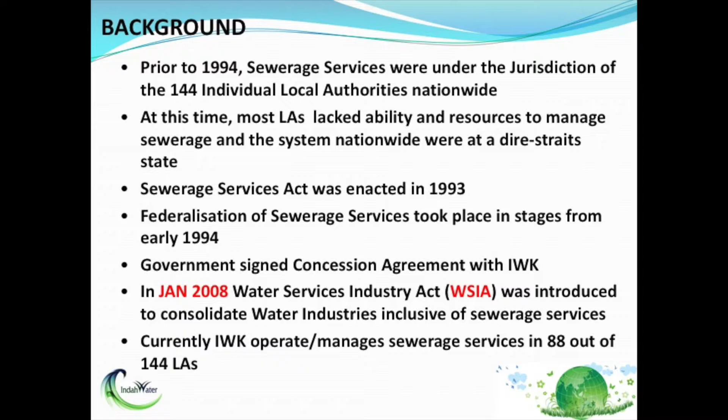This is the current governance structure for Indah Water. So under the Malaysian government, we have 3 ministers that we have to report to: the Ministry of Energy, Green Technology and Water, Ministry of Natural Resources and Environment, and of course our big boss, Ministry of Finance. So all this funding, all this government support loans will of course come from MOF, Ministry of Finance.

So under Indah Water, we operate 88 local authorities. So billing and collection comes from Indah Water, we give it. Refurbishment and upgrading program, basically upgrading of plants, maintenance wise. Okay, so all these charges must be under Indah Water.

All these treatment plants, like you are in here right now, it's not being built by Indah Water. It's being built by the developer. All the plants are built by the developer. Then only they will fully give it to Indah Water to operate. That's it. So we are like the main operator.

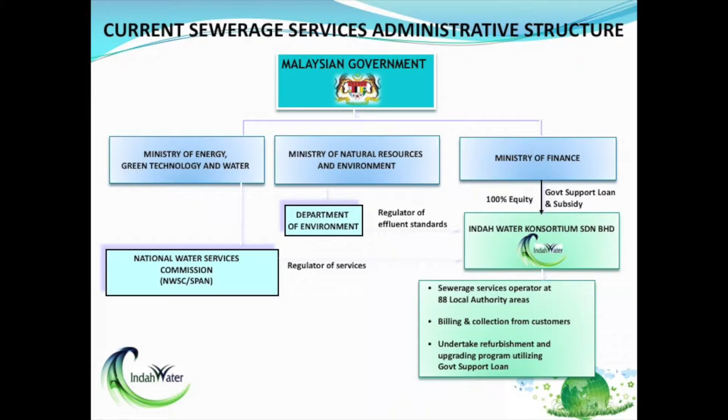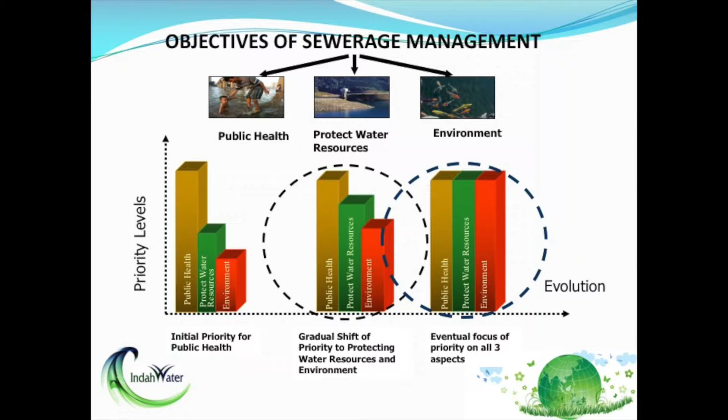Objectives of sewage management, of course, protect the water resources for public health, for betterment, for the good environment, and to eliminate all waterborne diseases. That's why we have sewage management.

The type of system, we only have two systems, which is connected system and IST, individual septic tank. This is the

animated view of the sewage treatment plant for extended aeration, from your house until the plant itself. So from your houses, we have the private sewage pipes. This is all the wastewater.

Just to inform you guys, Indah Water only treats domestic wastewater. Commercial we don't treat, like all these factories and so on. They have their own sets of treatment. So we only cater to domestic, which is houses.

Apartments and condos, so all these private sewage pipes enter the inspection chamber, then the public sewage pipeline, and the raw sewage enters the pumping station to the screening chamber, mechanical screening chamber, where they remove grit, flow management, and remove all the garbage. Then only the raw sewage wastewater can enter the aeration tank.

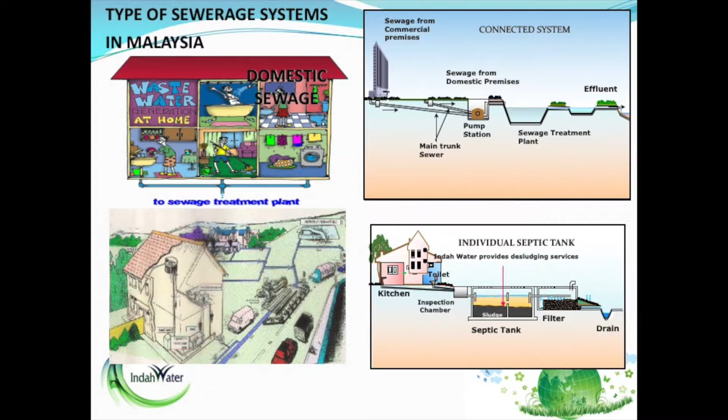So basically it's all biological treatment. There's no chemical added. It will go to flow distribution, final clarifier, which is a sedimentation process. Then the effluent will go into the nearest drain. It's very straightforward, very simple treatment. Basically, we just put oxygen

inside here, there are a group of bacteria, but of course for that we need to ask the plant manager what group of bacteria that we planted in the water treatment. We walked through the slide before.

From domestic customers, channels go to underground pipes, grit chamber, cleaning process to remove trash, large debris, grit and sand. This is where, probably if you read the papers, you can find

babies, fetuses being thrown into the toilet, being pumped in. So it will start in the screening chamber or grit chamber, that is where they will start. Every time, if someone unfortunately just throws away their baby, it will start at the screening chamber. So this is where we will find it.

So all this trash, we will catch here first. Then only the water can go into the tank to remove the suspended solids, and again the wastewater will go into the aeration tank. In the aeration tank, the air contains oxygen, which is used by the aerobic bacteria to neutralize the organic waste.

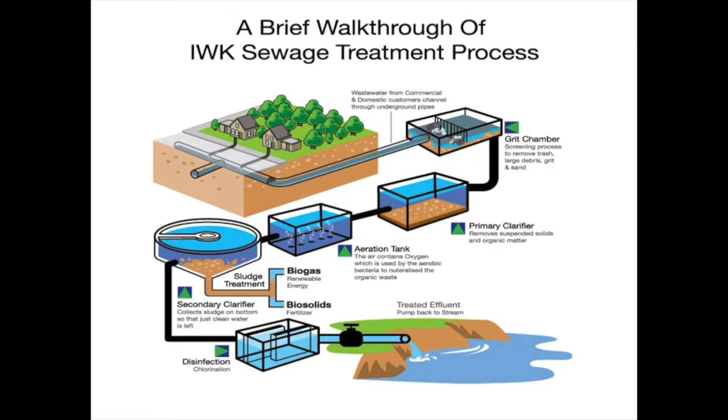Okay, this is the IST system. It depicts the flow of sewage and waste from your toilet, bathroom, kitchen. Every time you do your business in the toilet, all this wastewater will go into your septic tank. If you guys have ever seen a septic tank before, the rectangular thing that's always rusty.

Probably there you will see IWK or pembentungan, for example, probably 18 by 24. Probably you saw that, okay? Probably at the side of your house, in front, but it will be in your house. Have you ever seen it before?

So usually you have 2 to 4 in your house. If you have 1, meaning your house is using a connected system. Very easy, if you have like 1 chamber only, either rectangular or round shape, you are using a connected system. If you have 2 to 4, the house is using a septic tank.

So septic tank is a system that exists from the 1960s. Until now we have nearly 2 million septic tank users. So septic tank users is where you can see the Indah Water lorry will come and do the desludging from your house. So this is how they use septic tank.

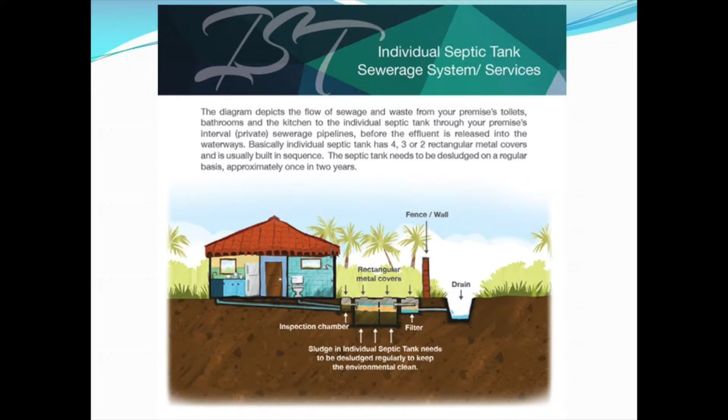They opened our manhole and threw cement in there, to make their life easier of course. I don't know how they can open our manhole like that. They pour cement and all this garbage into our sewer system. What happens is our nearby plant gets affected, because the sewage gets harder to treat. So that's one example.

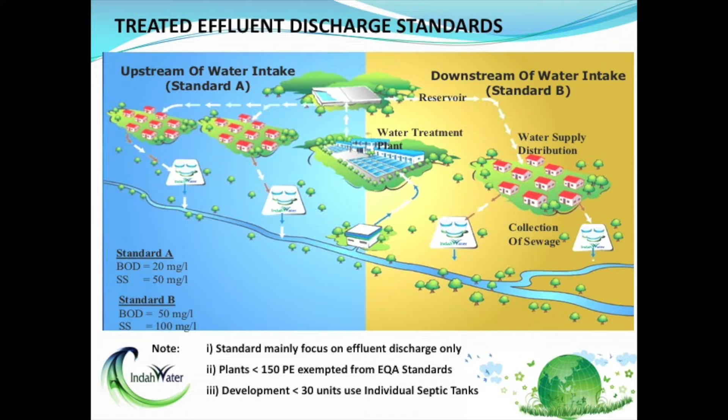We operate more than 80 regional sewage facilities. These are some examples of our regional facilities. The main ones in Klang Valley are Pantai STP, Bandar Tun Razak, which is here, and Taman Tun Dr. Ismail.

The design population equivalent here is 100,000, but we can cater to nearly 500,000 people in Bandar Tun Razak, with a carrying capacity of 22,100 meter cube per day.

The process is sequencing batch reactor. What I know about SBR is that basically all the treatment is done in one tank, so all the emissions are in one tank. If you have any questions about SBR, you can ask the plant manager during the plant visit.

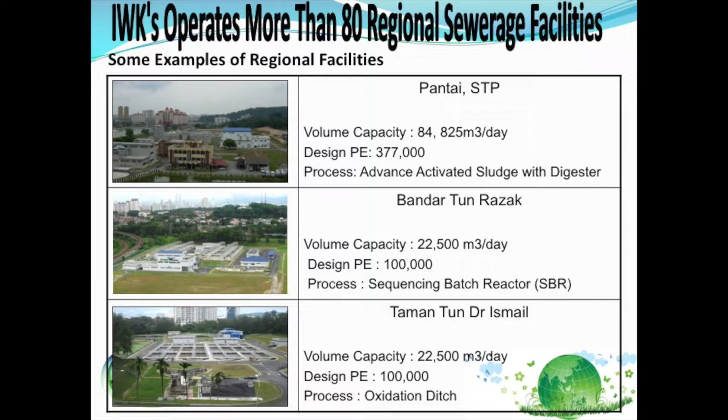Sustainable sewage planning - let's skip this one. Here's an example of improvement after effective planning. On the left side is an example of a treatment plant that doesn't look like a treatment plant.

This is before 1994, when the plant was taken care of by the local authority. This is how it looked - it doesn't even look like a plant. The sewage was discharged directly to coastal water. Even at the Bayan Baru sewage plant, you can't even see the plant.

After that we improved it. Of course, we designed a new STP treatment plant. Bayan Baru, we upgraded it, so at least we have our own clarifier now. This is in the Penang area.

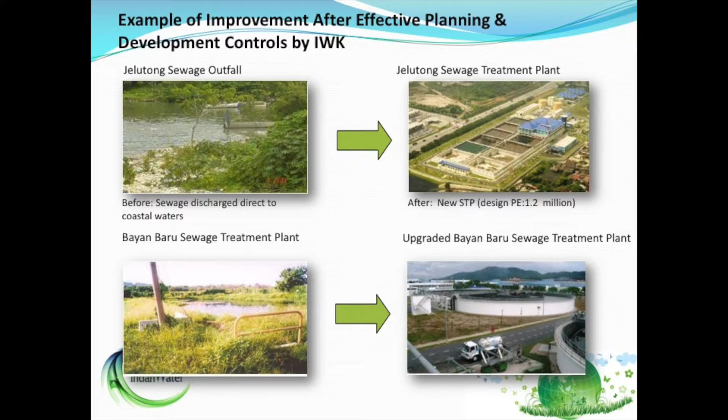But not everyone knows that. So, plant refurbishment to improve public sewage facilities. Refurbishment of STPs covers 5 categories: safety, mechanical works, electrical works, civil works, refurbishment of sewer network, CCTV investigation, rehabilitation.

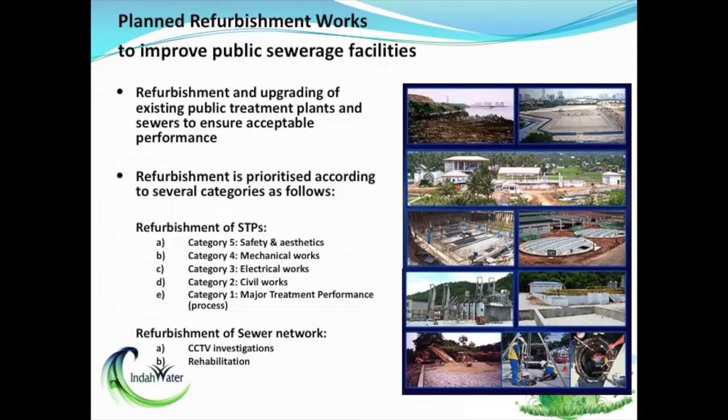We have a customized system for managing customer inquiries, requests, and complaints 24 hours a day. So if you have any complaints about overflowing manholes, plant problems, or the famous missing manhole cover, you can just call IWK online.

Value for sewerage development - this is our R&D findings. This R&D findings is basically located at our plant in Bunus, where we have a small R&D facility.

TTF, our technical training facility - we have a training center in Sungai Besi. If you've ever gone on the Sungai Besi highway, you can actually see it on the right hand side, if you're from KL. We have a basic research laboratory for experiments, a collection of sewage equipment for training, and some basic amenities.

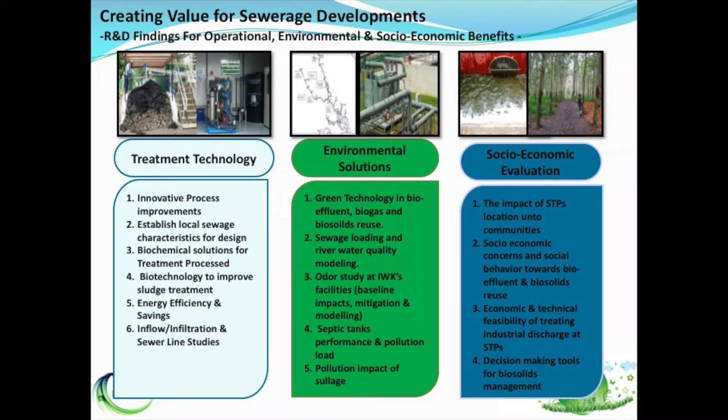These are just some pictures of our training area: demonstration for SCV, a mock facility for control planning, and the famous confined space training, where you can actually go into a manhole. Confined space training is the famous one.

Our station at the international level - we have MOUs signed with other countries to help them improve their water sanitation or sewage systems in their own country. We've had study visits from Oman, Iranian delegates, and the Philippines.

Sewage charges for government premises: 40 ringgit monthly for connected service and 25 ringgit monthly for IST. This is based on average water consumption in excess of 100 cubic meters monthly.

For domestic payments, the charge is 8 ringgit monthly for connected service and 6 ringgit monthly for IST. These are the two charges for every month, but our bills come quarterly, so probably you will pay around 18 to 24 ringgit per quarter.

Some houses pay 2 ringgit charges, but basically that's for low cost premises under the government, so they only pay 2 ringgit.

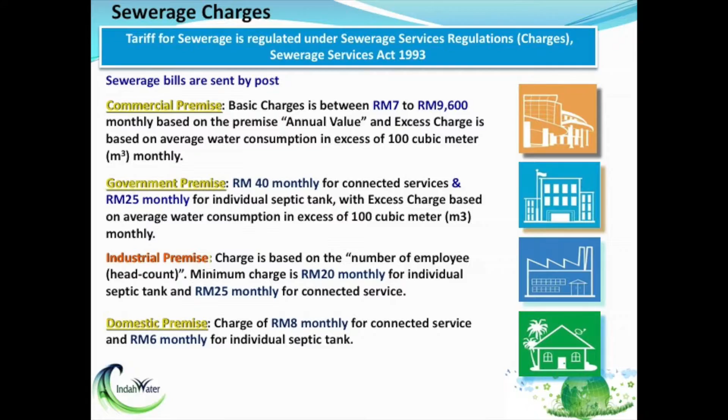Communications program: we have our own public relations, operational issues, illegal connections, faulty sewage systems. We need to find solutions with members of parliament, and we engage state executive regulators. For any complaints or inquiries, we have to reply within 24 hours.

TV advertisement - I don't know if you guys have heard us in the news. Newspaper ads, some ambience advertising, like putting stickers in the lobby to make it more presentable to the public. It's more like our branding agent.

Radio commercials - does anyone ever tune in to Bandar, Hot FM, My FM, or no? Radio commercials and publications.

We exhibit materials once in a while. Exhibitions - basically this is more on our R&D products, like biosolids and biogas.

Community engagement - we engage with the public in terms of friendly posts, close to the community. We create fun events like coloring contests, clown performances, basket performances, to engage more friendly with the community. So we have face-to-face explanations, and we can set up inquiries and payment counters during community engagement.

So that's it. You guys have any questions regarding buildings? About the plant, you can go to the plant visit and probably ask questions about what treatment is done by the plant engineers. But on this slide itself, do you have any questions?

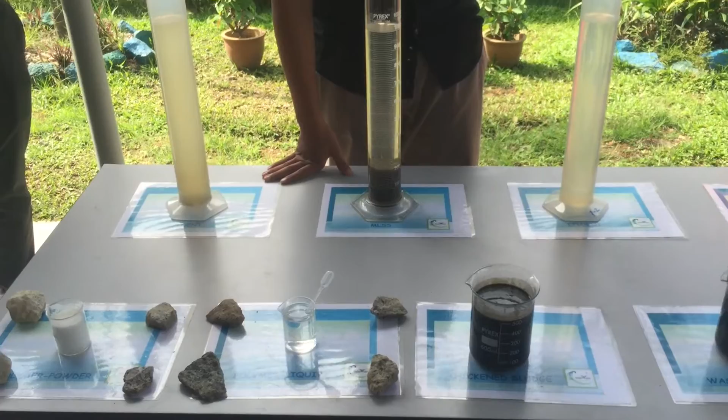No? Probably after this, after the plant visit. Okay, so now it's done. Instrumentation - inside there, they will have my colleagues, one responsible for process and another responsible for sludge. So I will brief you before we go to the site visit, briefly giving an overview of our system here.

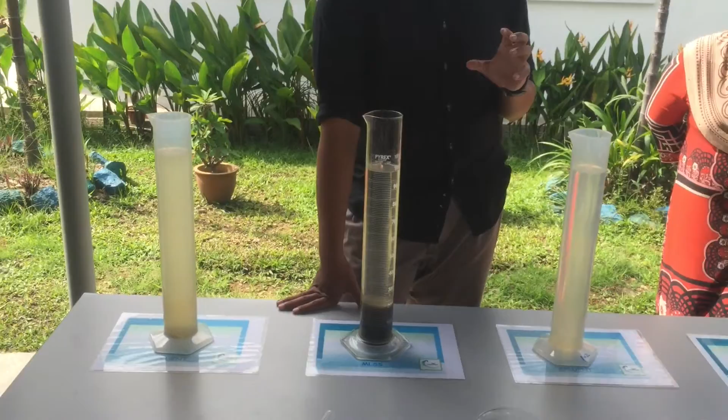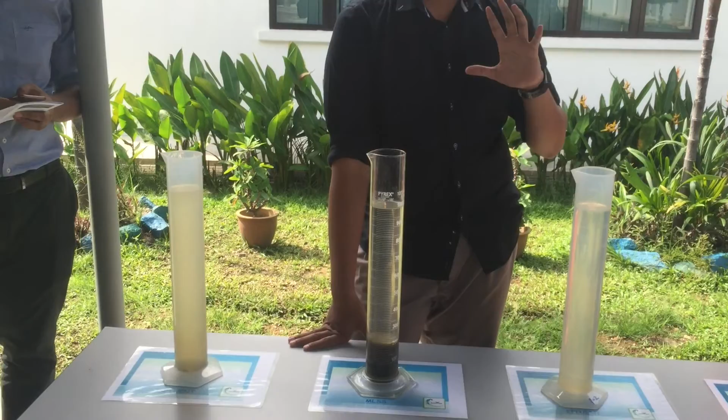Basically, our plant operates based on the SBR system. SBR stands for sequencing batch reactor. If you go to any water plant, they will have a specific operation, what we call unit operation. Here we use SBR. If you go to another plant, maybe they will have a conventional aeration system, maybe an oxidation pond, or an oxidation ditch, or something else. But here we only operate using the SBR system. So if you go to another plant, there will be a different system.

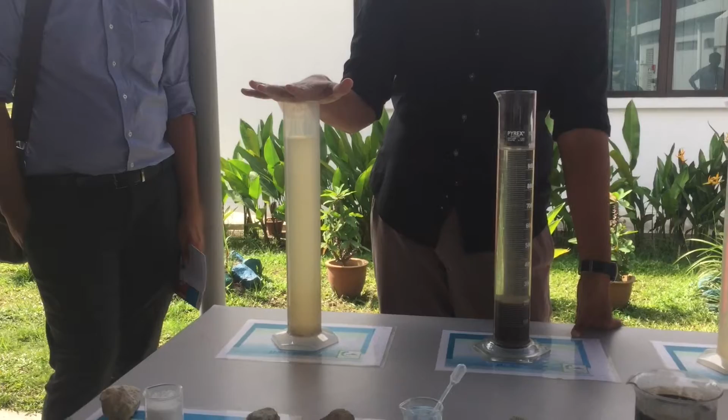Basically, what we treat is wastewater, domestic wastewater. This is the influent that we receive from two pumps - we have two pump stations, one located behind there, and another one behind there. So whatever sewage there will be pumped into our plant for treatment. This is the sample for influent, what we call influent. This influent will undergo preliminary treatment to remove grit, sand, and also oil, before it is stored temporarily in the EQ tank, the equalization tank. Then from the EQ tank we pump it into the SBR tank, which is the heart of the process. In the SBR tank, we monitor the MLSS, DO, and pH.

Okay, so after it undergoes the SBR tank, the final effluent will be discharged straight away to the river. What we get from the SBR are two products: effluent, which is water, and also sludge.

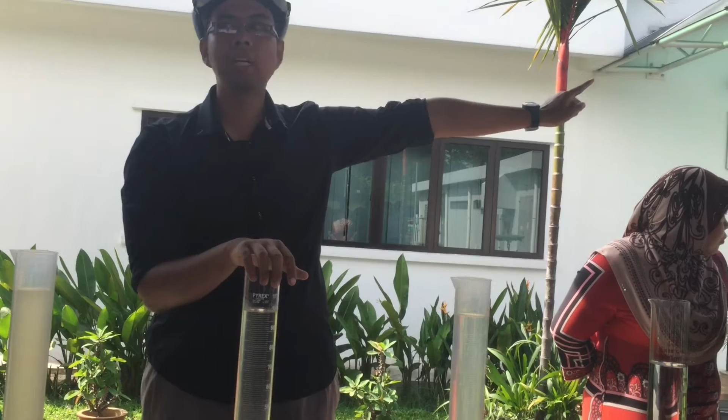We call it biosolid. The water will be straightly discharged, but the sludge will be pumped into our SHT, which stands for sludge holding tank. This sludge will be further treated to remove the water content before it can be disposed of.

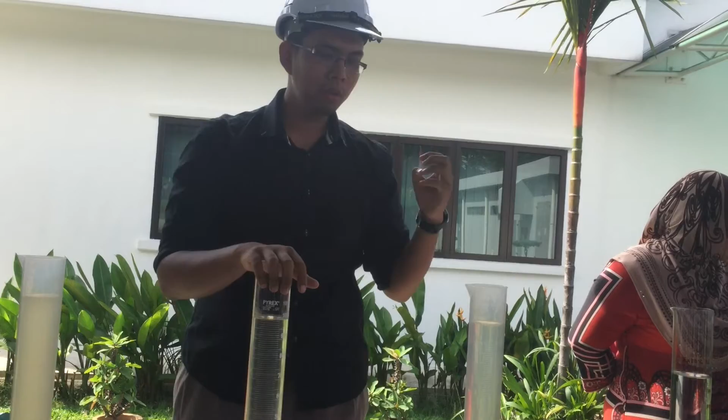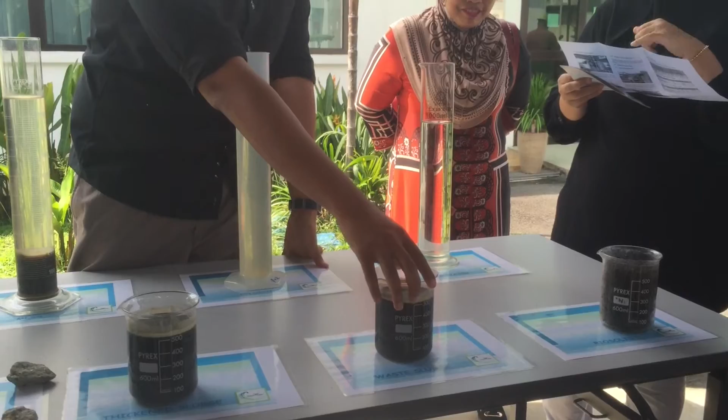This is waste sludge, which is the sludge purely from the SBR, and it will be stored in the SHT before treatment. After that, it will be pumped into the mechanical thickener.

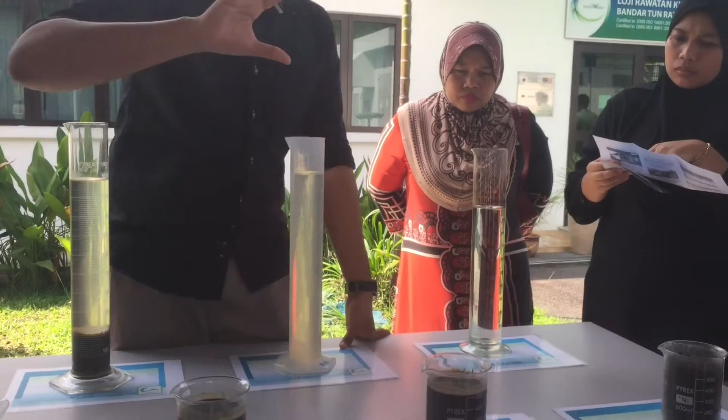In the mechanical thickener, we will remove the water up to 2 to 4%, so the water content will be a maximum of 96%. We add polymer as a dewatering aid to enhance the flocculation so we can remove more water.

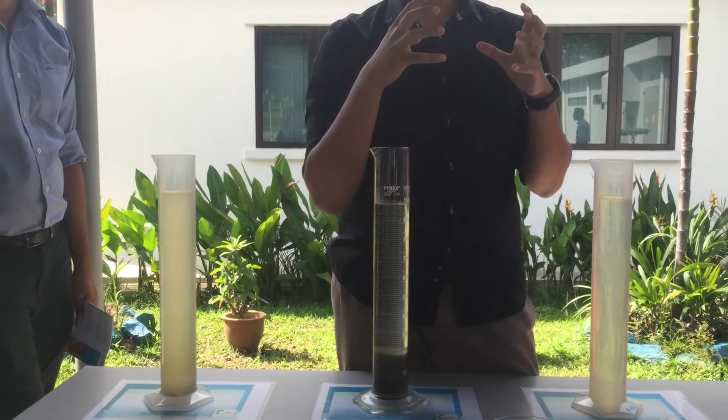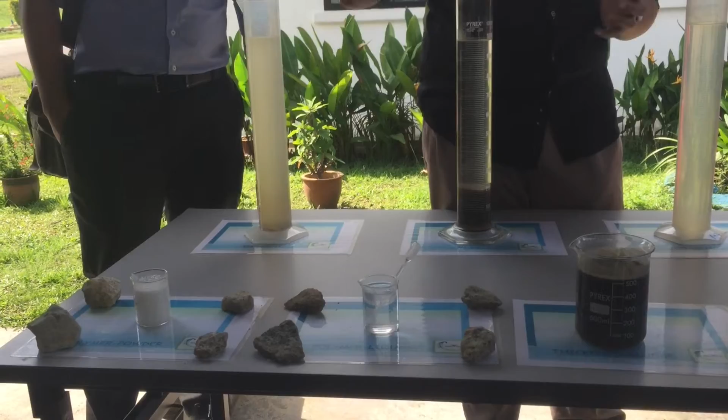This is a sample of our solid polymer. This polymer needs to be dissolved first with water, then added into the waste sludge, and then it becomes thickened sludge, which temporarily goes into the thickened sludge holding tank.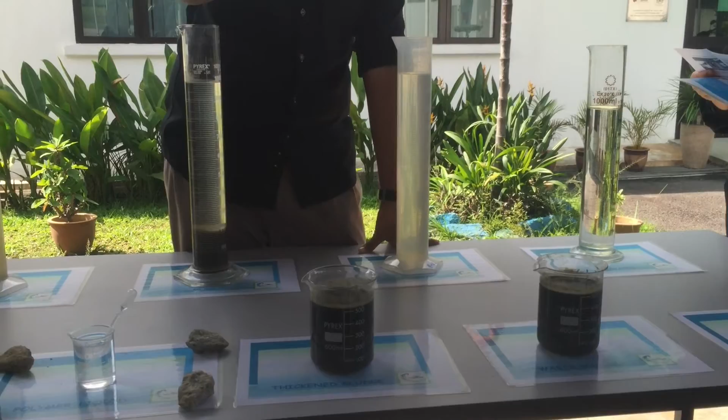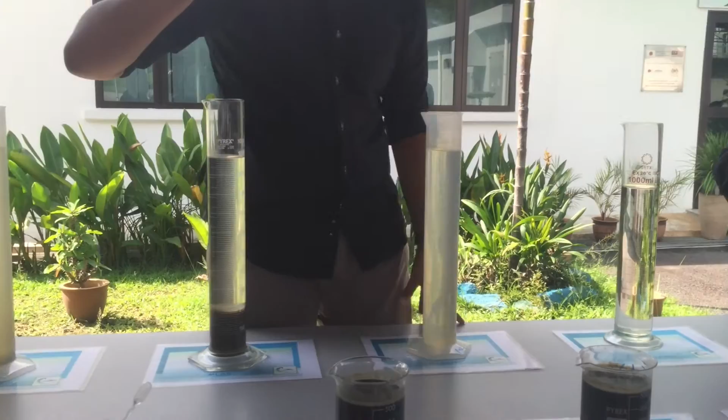After that, we dewater it again using our dewatering machine. Just now the water content was up to 96%; after it undergoes dewatering, it will reduce the water content to a maximum of 85%. This is the final product after dewatering, the biosolid, which will be disposed of into the landfill.

Currently, selling it for fertilizer is still under research. Here in Indah Water it is still under research. I don't know about outside, because here our main activity is operation and maintenance. So whatever product we get here, our HQ for R&D will get the sample to do more research and come up with their idea to sell it or use it for fertilizer.

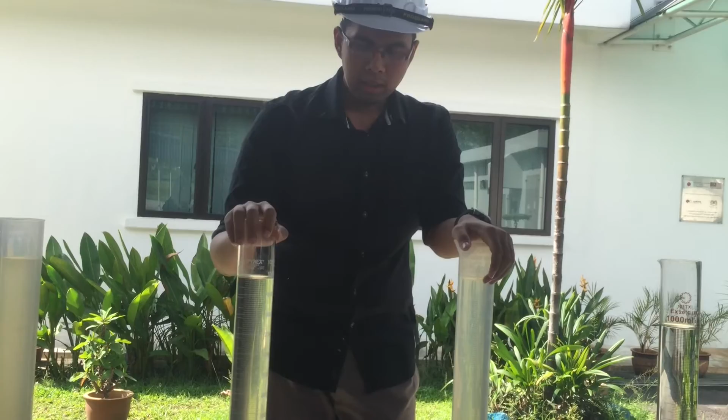What is MLSS actually? This stands for mixed liquor suspended solid. If you study environmental engineering, in wastewater treatment there are some parameters that we need to monitor during the process, and one of them is MLSS.

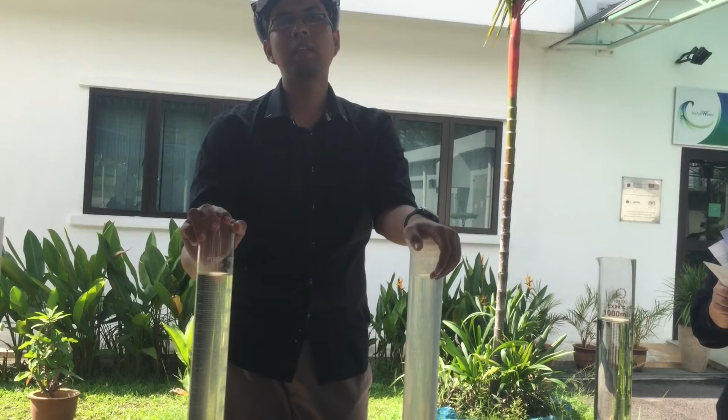MLSS represents the mixture of BOD and the mixture of microorganisms in the water. We have to ensure that this MLSS value is at the right, optimum value, so that the removal of BOD and also SS and ammonia is at the optimum condition.

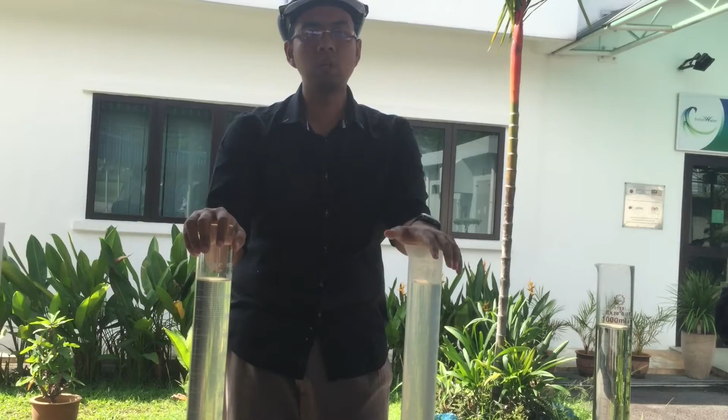Our main parameter here is to remove the BOD. So to know the BOD level, we are looking at the MLSS mixture during the process. We only measure the BOD level for the final product, the effluent.

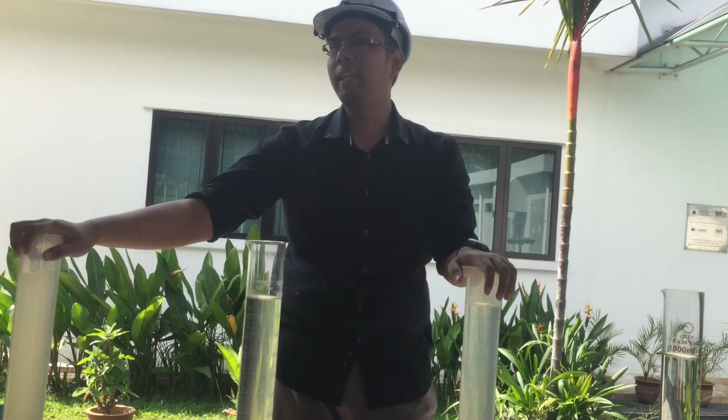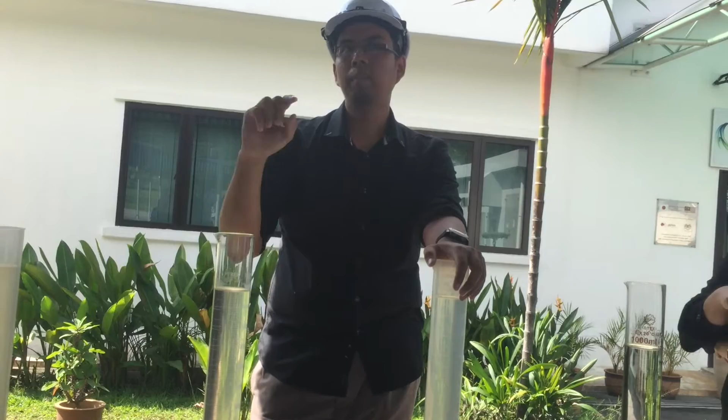We measure BOD for the influent. Normally we get around 200 BOD, and after the process we measure again. To comply with Standard B under the Environmental Quality Act, the BOD limit is 50. Here we get below 50, even around 4 to 6.

Is there any other standard and what's the difference? In the EQA, Environmental Quality Act, there are two standards, Standard A and Standard B. Most IWK plants comply with Standard B. Is there any IWK plant that complies with Standard A? One, and it's Bunus - Standard A.

Most IWK plants comply with Standard B only, because our water is discharged into the downstream part of the river. Whatever is discharged at the upstream part is collected by Syabas for further treatment, and that has to comply with Standard A. Standard A is so-called superior to Standard B.

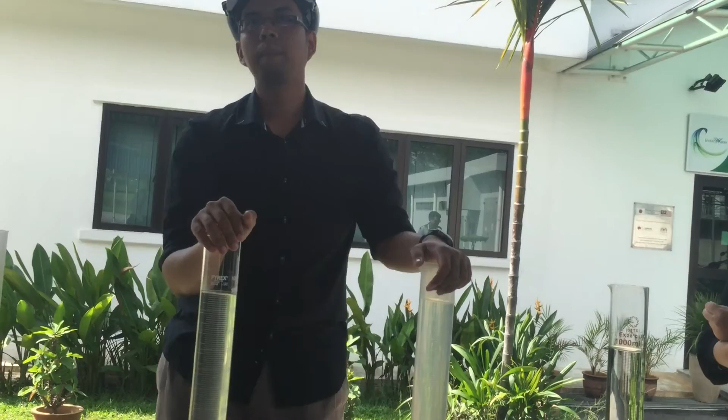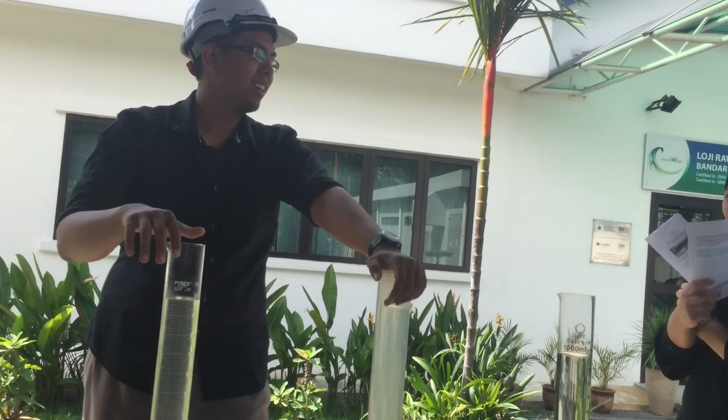Volume - no, we did measure the volume. I mean whatever incoming volume, let's say 2,000 meter cube, we have to ensure that 2,000 meter cube also goes out. How do you measure?

Okay, that's our daily activity for the process part. Normally during the process we have sampling.

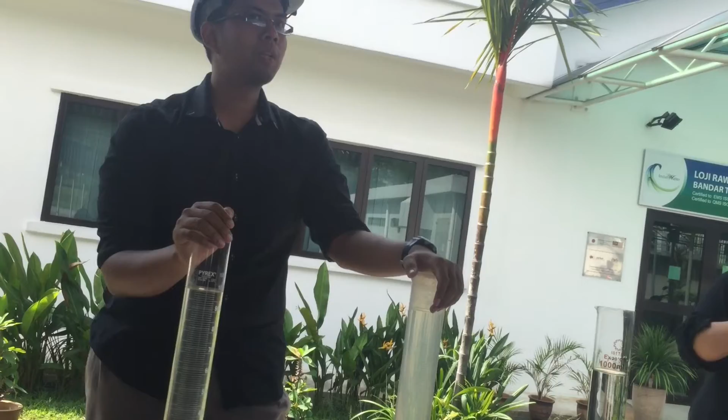During sampling, we take a sample and put it under the microscope to check. We have our own standard for what kind of microbe has to be present in that particular wastewater treatment. We already did a study showing that in this area there should be this kind of microbe, so we just check if it's present.

Okay, that's fine. What kind of water? Oh, that one I have to ask my colleague.

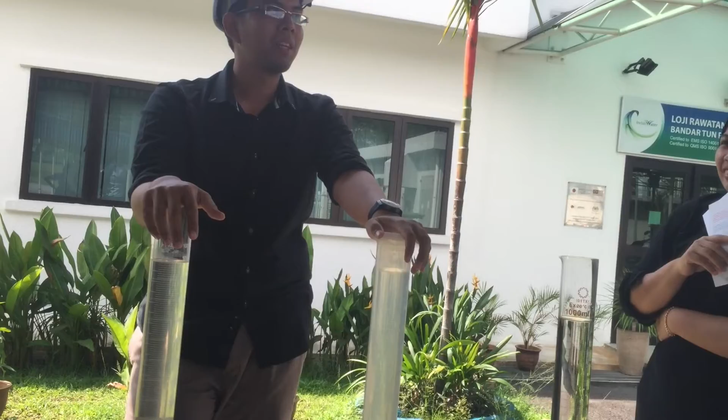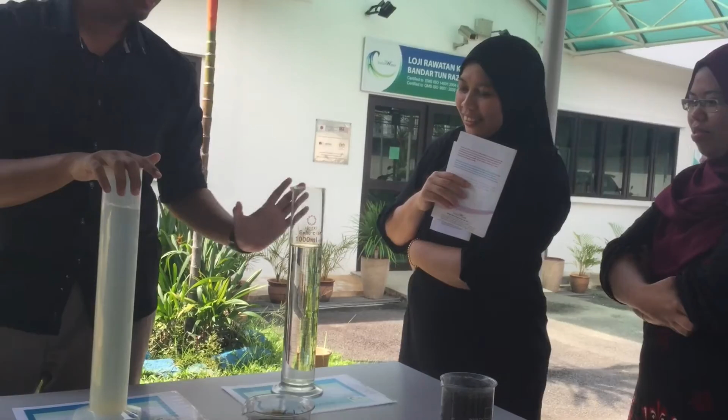This I just want to show you the difference between our bio-effluent and Syabas water. Physically we can check there's nothing much different, that's what we want to show you.

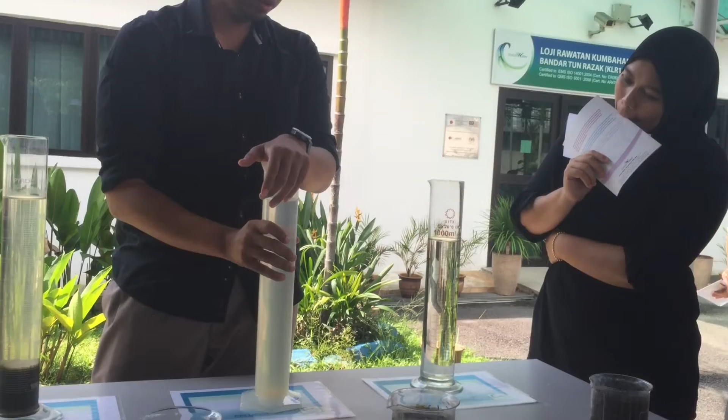We should put it in glass too, otherwise we cannot see properly. Sampling should be glass to glass. Put the Syabas water into this, then you can say it's better than Syabas water.

Maybe you just change it like this. Question now.

For odor control, we have one more extra facility called the odor scrubber. Later we'll show you the pipeline, whatever gases that come up from our facility will be transported into the odor scrubber behind there for further treatment. Whatever smell will be treated inside the odor scrubber and then released as normal air.

Actually, it only reduces the smell. I think you still smell it, but just a little bit.

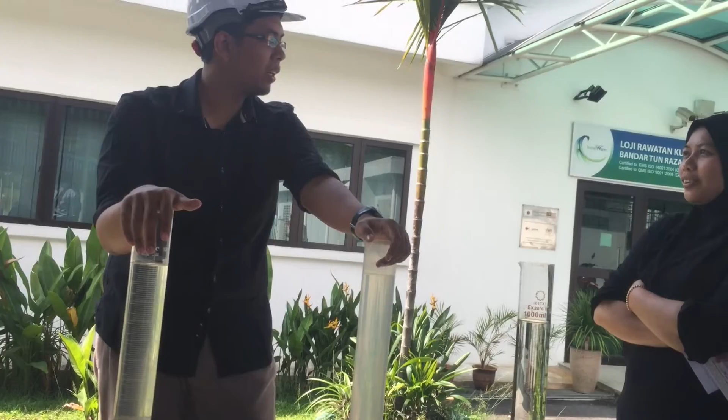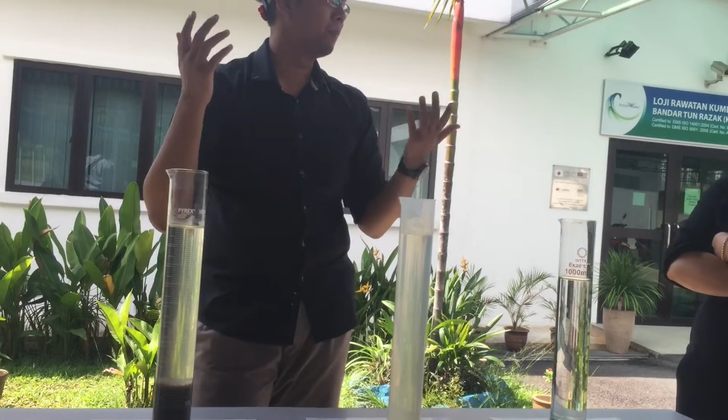You have to understand, here is O&M, operation and maintenance. So this is, I think, the old system. We still haven't implemented any new system in the market.

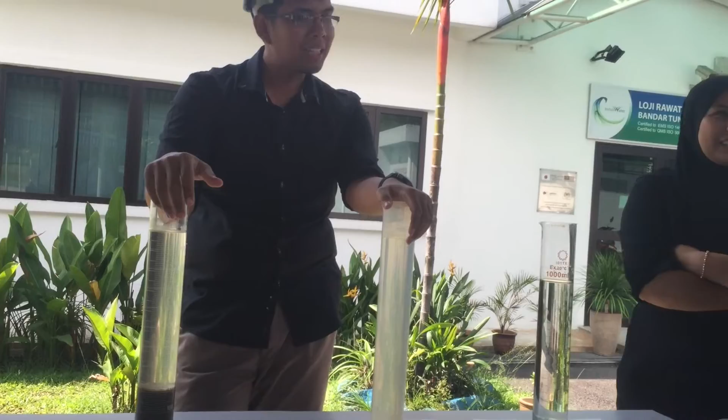Yes, correct, COD we also monitor. So what are the things you monitor in the COD? The COD and BOD, same also.

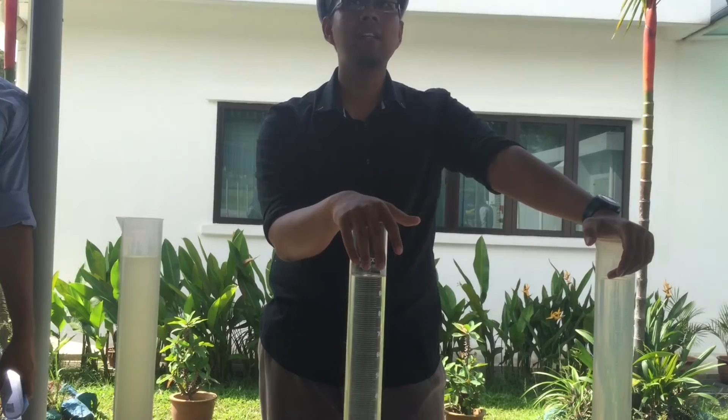Okay, any other question before we proceed to the site visit plan? Okay, so before we start.

In terms of energy, I can say daily we are in the range of around 8,000 to 10,000 kilowatt hour here.

You use or you produce? Because a water plant is usually the one that uses energy, right? This one uses electricity, around 8,000 to 10,000 kilowatt hour daily.

So do you plan to improve to become more sustainable? Yeah, sure, actually this is already improved. Whatever contributes to more energy usage, like the agitator motor, if there's nothing inside, we will not run it. We only run it at a certain level.

Let's say the tank sludge level is only 1 meter, so we don't run the agitator. Only when the sludge level reaches 2 meters do we start running the agitator. So that's our plan to reduce energy.

Plus, the main contributor to high energy usage is our blower, used for aeration. This blower is around 220 kilowatt, so if you use it for 1 hour that's around 220 kilowatt hour. Mostly our SBR blower will operate around 5 hours a day, so this contributes more to energy usage.

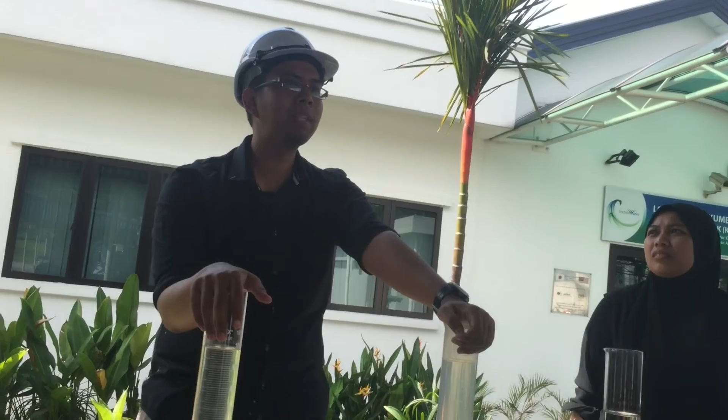Do you have work shifts? No, as the management team, we don't work in shifts. Only the operators work in shifts. If there's any problem, the operators will call.

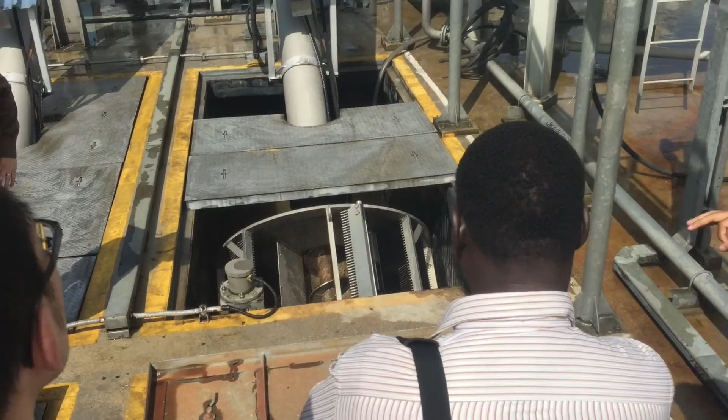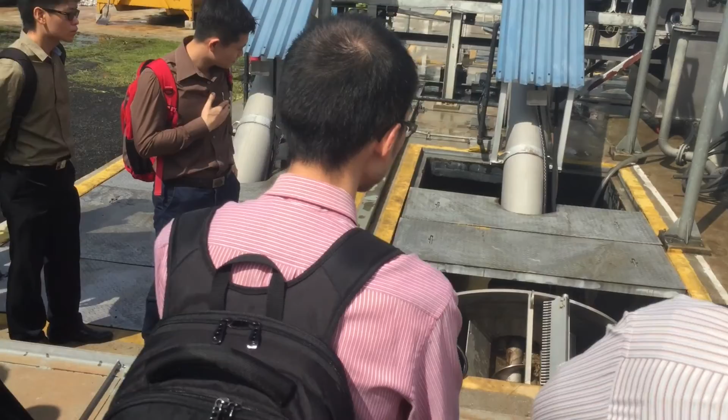Pump station. So whatever water coming will be pumped here. This facility we call it grit chamber facility. At this facility we remove three things. First is what we call sampah, rubbish, through screening. There are two types of screening here: first bar screen, then second is rotary screen. The function is same. This bar screen we have to remove the rubbish manually, like that, the rubbish is there but our operator has not yet removed it. But here the rubbish will be removed automatically using the conveyor.

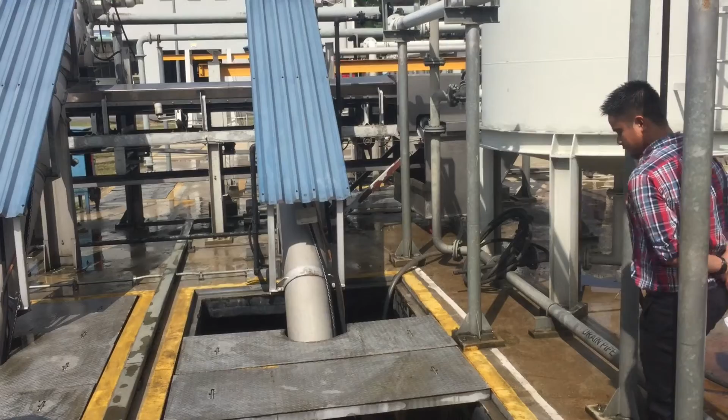How do you differentiate scheduled waste and solid waste? How do you differentiate solid and scheduled waste from this process?

Solid, you can see the solid waste, the normal waste like plastic. The scheduled waste is the used oil, whatever. If you know scheduled waste, then chemicals. Actually the scheduled waste is generated by us, because scheduled waste is like, example scheduled waste is chemical. So whatever chemical that we use for testing, that one we categorize as scheduled waste. So it does not come from the water.

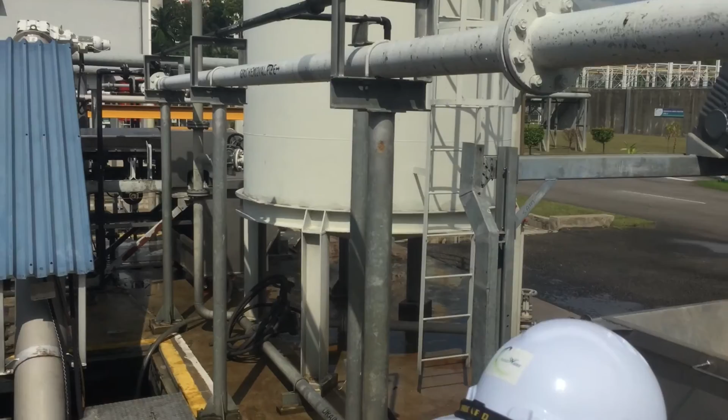No. From the water only the solid waste, normal solid waste.

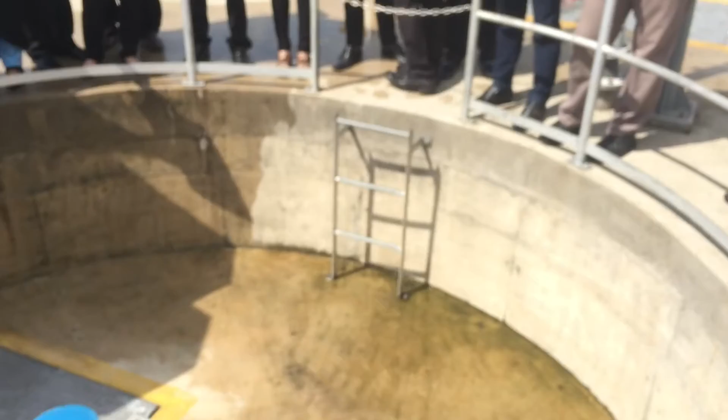Okay, so after we remove rubbish from the wastewater, next step is to remove the grit, pasir, sand. So this is our facility to remove the grit or sand.

What we call is grit classifier. So how it works, you can see that there's one motor and then below there we have one agitator. You can see the water is rotating, right? So once the water is inside this chamber, the agitator will rotate, so whatever heavy things will settle down. So whatever grit and sand will be settled down, and then this we can remove through our grit removal pipe. You can see here.

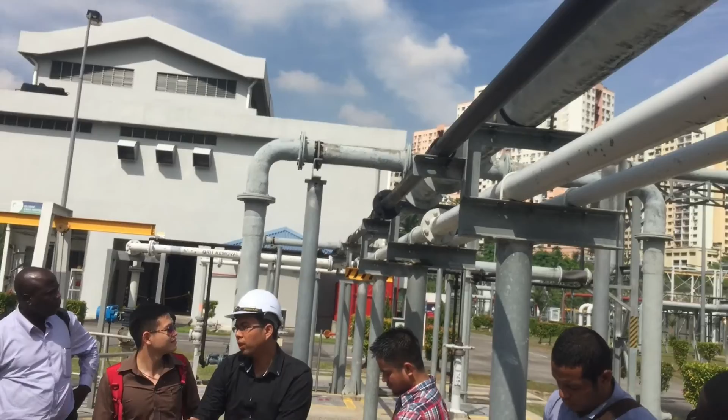So below there we have one pump, what we call grit removal pump, just to remove the grit. So that pump will pump whatever grit that settled down, and then will be pumped through this pipe, and then will be temporarily stored behind that bin.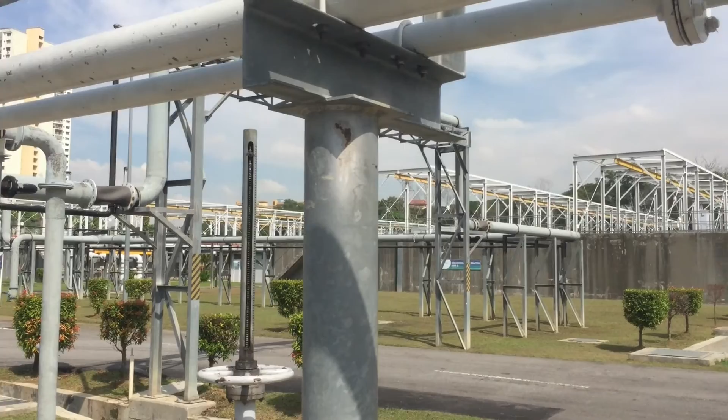This is the result after we remove rubbish and grit from the water that has gone through all the processes.

So this water will be temporarily stored into the EQ tank. We have 2 EQ tanks. If you can see here, equalization tank number 2 and equalization tank number 1.

So the question is, where is the tank? The tank is underground. And then what is the purpose of the equalization tank?

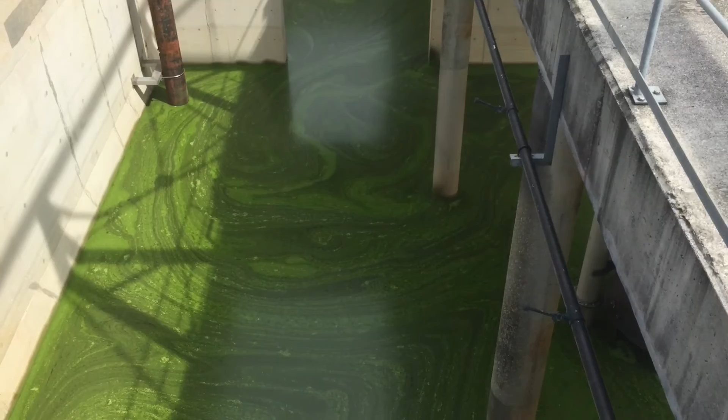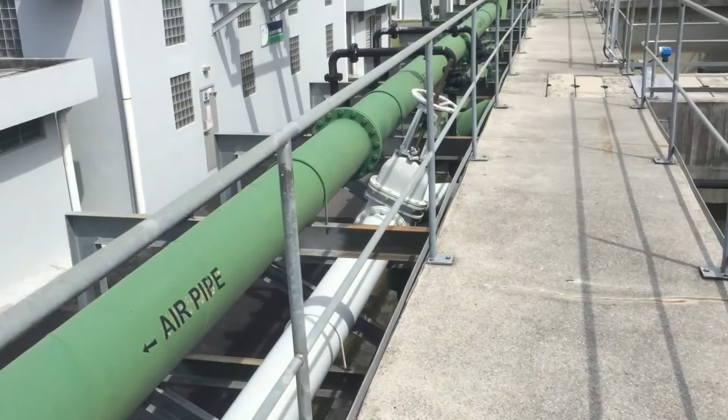Blower house. So this plant will be treated using 2 stages, both are the same. So here you can see polymer feeding. Below we have 3 polymer dissolving tanks.

Screw press, we will press. So that's it. Oh, it's cut off. Can it come on? This video seems...

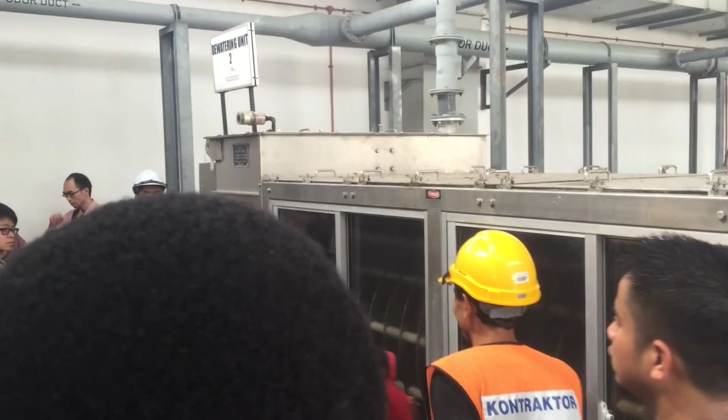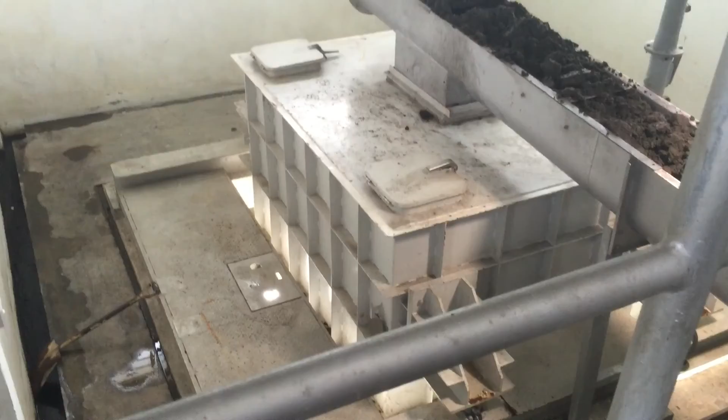We will pump into the dewatering machine, and then we will add polymer again, so we get the biosolid. You can see the biosolid will be transported and stored in the hopper.